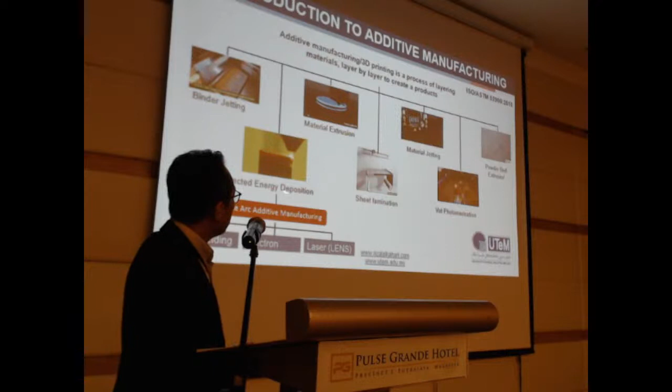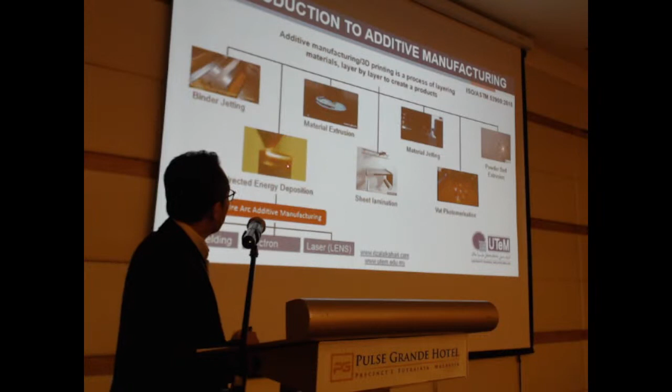So my presentation mainly covers material extrusion, directed energy deposition, and powder bed fusion. Throughout my work and my team's work, most of us focus on this. Of course we have the machines, but more for teaching and learning. The research we do basically focuses on DED, material extrusion, and powder bed fusion. There are a number of classifications for each of these groups, but since I focus more on wire-arc additive manufacturing, later on I will focus more on arc welding.

Okay, so basically this is the difference between the processes, how the materials are laid layer by layer. And these are some of the facilities that we have at the university: binder jetting, selective laser sintering, digital light processing, microjetting, stereolithography, fused deposition modeling, and for metal we have SLM, the open source system from Aurora.

Last year, one of the faculty purchased an SLS, and just early this year we received our robotic WAAM, which we use for CMT. We also utilize a customized microplasma WAAM developed through our project, which has been customized from an open source system. So basically, we utilize a lot based on these machines.

Okay, so if you look at the recent progress and perspective of 3D printing or additive manufacturing, we can see there is an increasing number of people starting to use it. Reports suggest this number will increase further in the future. So having this team, I guess, is the right time for us to focus in this area.

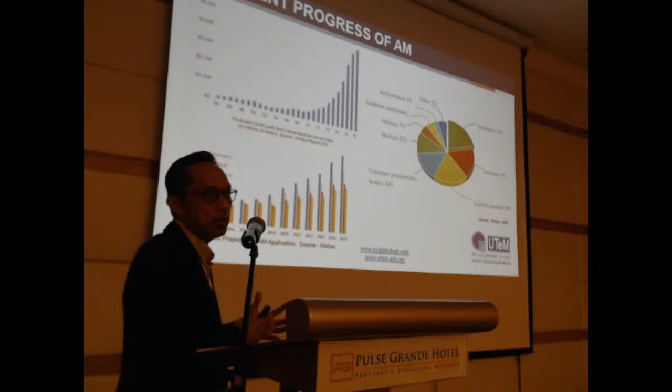In Malaysia, even though there are a certain number of companies trying to offer services in this area, when we apply it to real industry parts, there are a lot of issues. It has also been said there is strong demand for metal parts, even though it's expensive. Many companies are looking forward to having this sort of system in the future.

Then in terms of application, you can see a number of significant projects in the world right now. For example, we have various complex engine parts that utilize metal 3D printing.

This year, a few months back, we had the world's first 3D metal printed rocket by Relativity Space. In May, despite some issues, the rocket was successfully built using wire arc additive manufacturing.

And then we have the world's largest building in Dubai, and the world's first 3D metal printed bridge in Amsterdam last year. So you can see the trend: people are starting to use WAAM and 3D metal printing for various applications.

Even though there are a lot of challenges to implementing 3D metal printing in industry, for example in terms of cost, technical obstacles, standards, and material performance which are not on par with normal materials, people still start to explore the possibilities, despite lack of know-how and people's perceptions.

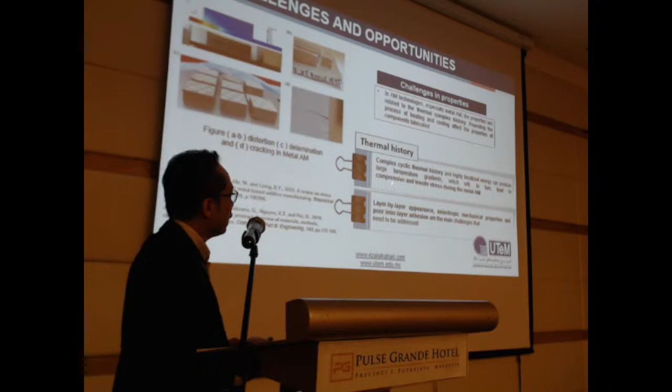So these are the things that are still ongoing research, and we can highlight and produce good results for this.

Okay, so other challenges and opportunities in terms of design: there is low geometrical tolerance, inconsistent part quality, and inaccuracies that will affect the quality of final parts.

But from another perspective, this can be an opportunity for us to do research, where we can reduce a lot of weight and improve thickness and consolidation of parts in order to produce final parts.

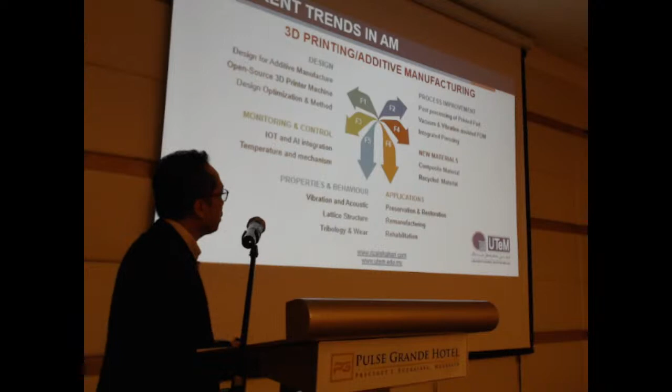Next I will highlight some of the research done at UTeM related to AM. We focus on a few aspects: design, monitoring - not fully controlled yet, just more on the monitoring side but looking forward to monitoring and control, and properties behavior. We apply these to different applications. There's also a team focusing on developing new materials, composite materials - we try to produce our own filament, for example. Another team focuses on process improvement, post-processing parts using vacuum and vibration assisted FDM, and integrated pressing. These are some examples I'll explain briefly, since we started a bit late.

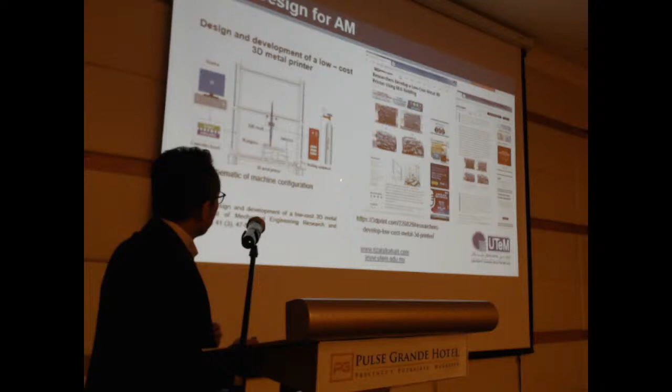There's also a team that developed a low-cost 3D metal printer using an open source system, the one we just saw, which received some coverage on 3dprint.com. We used a normal open source system and modified it based on the requirements for welding purposes. Initially it wasn't very successful, but now alhamdulillah we managed to create more complex structures based on this.

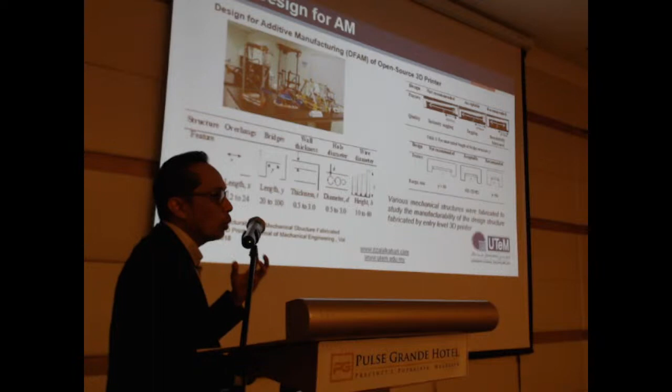There's also a team looking at DFAM - the ability of the parts to be produced with the limited or required behavior, for example, at what range it is suitable or not. We did some research on this.

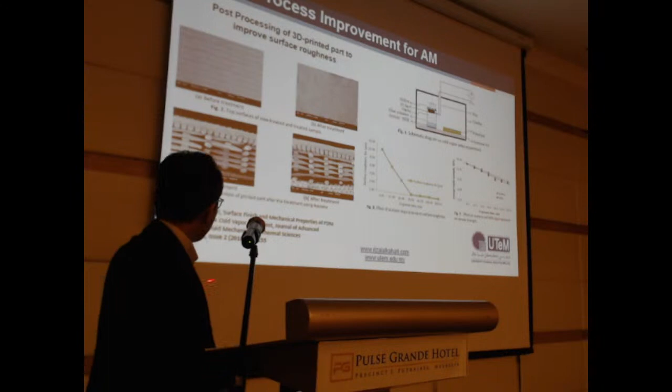We also tried to improve the process by integrating some sort of pressing, vacuum, and liquid deposition. These are some modifications made to the normal 3D printing process. For example, we have post-processing using cold vapor, as we call it. This was published in this journal.

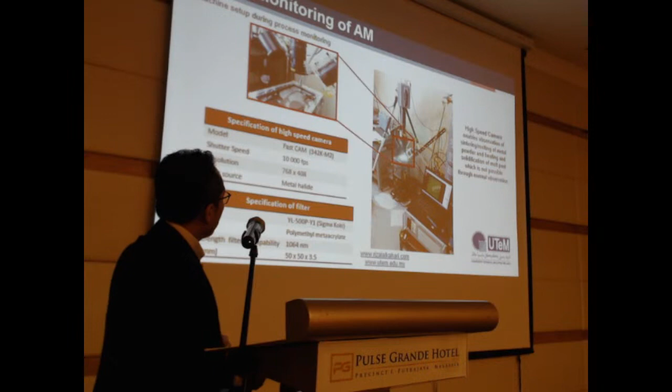Another issue in AM is that we would like to understand the process further by monitoring it. If you look at previous research, researchers tried to understand by monitoring the process closely, but based on that previous research, it's not very clear due to the limitations they had at that time. So what we did is set up this system to monitor closely.

Maybe we can display some video here. You can see actually the laser - this is during the SLS or SLM process. The laser is about the size of my laser pointer here, it's in front, and it will move. Based on that, we can monitor the process closely and try to relate it to mechanical properties.

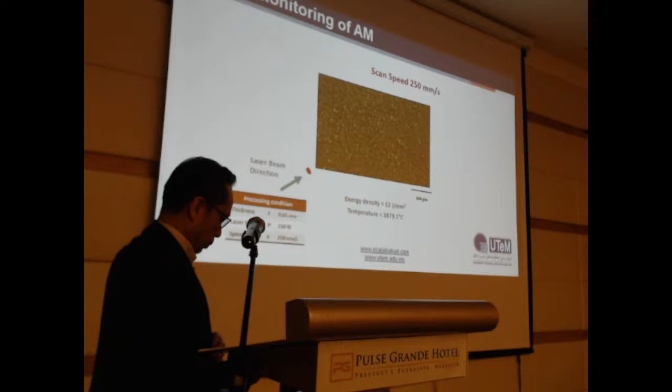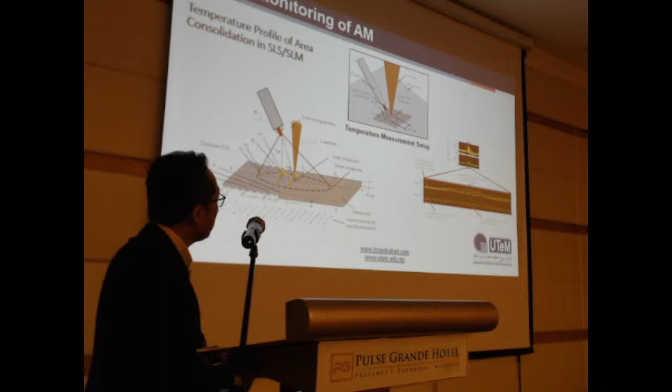So these are some of the labels that indicate the process itself, at different parameters. When we use different parameters, for example at higher speed, we can observe the fundamental issues and relate them to the mechanical properties. From here we can also check the temperature, because the properties are highly relevant to the temperature experienced during the process, and also the microstructure, because once we observe it, we can relate it to the common mechanical properties.

We also tried to observe this for WAAM, but it's still in progress. Previously it was for the SLS or SLM process.

There are some other studies related to materials - we try to use different materials, including recycled materials, and are looking forward to this for SLS, SLM for plastic-based material.

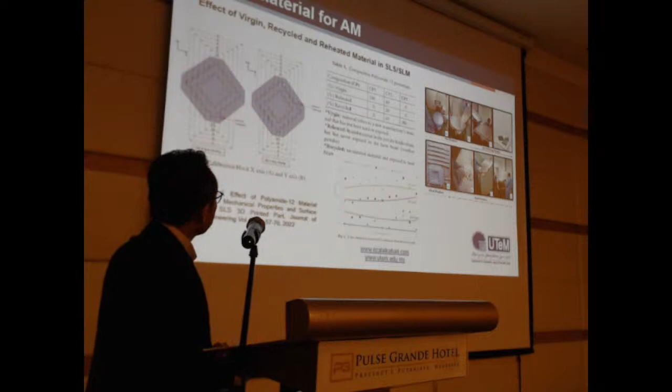There are also groups focused on developing new composite materials. At UTeM we have this twin screw filament extruder, and we can actually produce new filament using these machines, but it's still at the preliminary stage. There's also a team trying to relate the tribological properties, led by PM Dr. Fazli and the team.

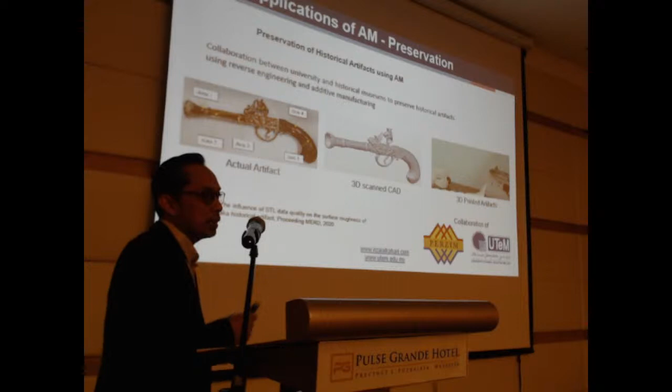There are also teams that work with PERZIM. As we know, Malacca has a lot of history there - the history of Malaysia begins in Malacca. So at PERZIM, Perbadanan - I don't remember the full name, something related to the museum - we try to preserve some of the historical artifacts by using AM.

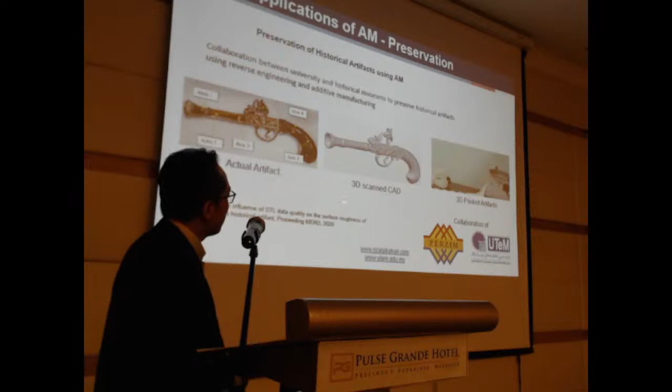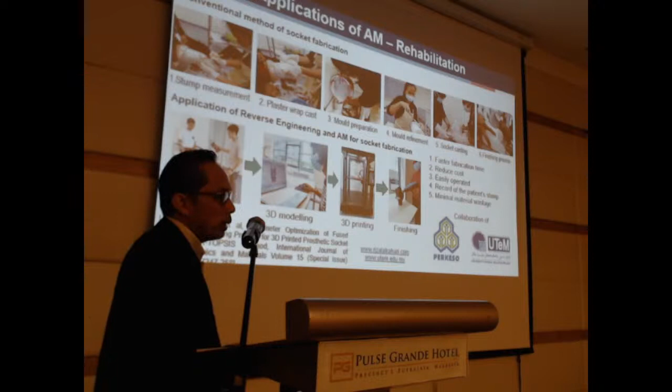We also have some work on rehabilitation. We work together with Perkeso to produce what we call the socket prosthetic leg, replacing the normal process. The normal process takes very long and costs are high, taking about 2 weeks to ensure the material is fully hardened and can be used. But now the time can be reduced to within 8 to 10 hours. Within 1 day, we can produce the prosthetic leg directly.

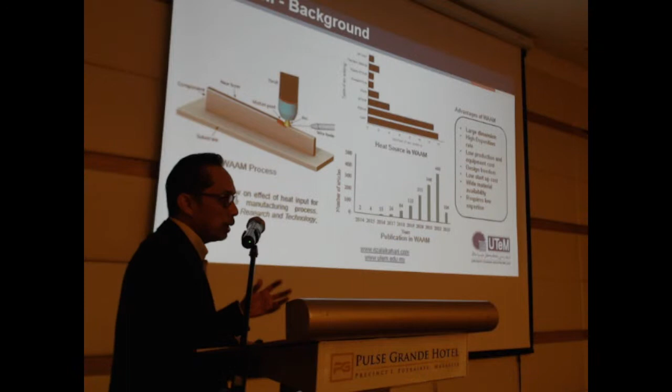A little background on WAAM - Wire Arc Additive Manufacturing. It's very much related to the joining process because welding is a joining process, but now we try to use it as an additive manufacturing process where we lay the welding process layer by layer. Of course, we have to make sure we use suitable parameters and settings so that we can produce a good part. These are the machines we have used.

We developed this in the lab. Initially, we couldn't even manage to get the 3D structure. But after some optimization and improvements that have been done, we recently, alhamdulillah, managed to get a more consolidated structure.

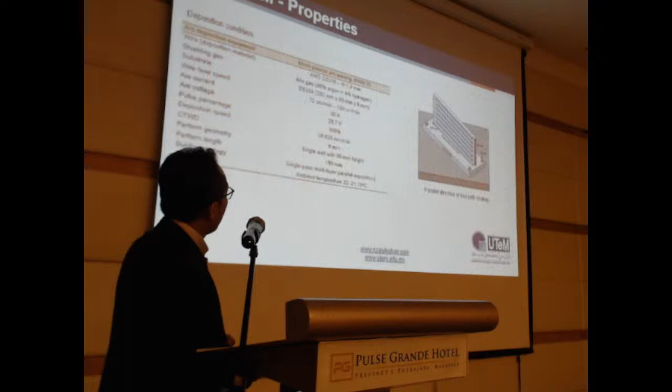These are some of the properties we have used, and then we go for microstructure analysis, studying how the hardness and microstructure differ from one parameter to another. These are some of the microstructures.

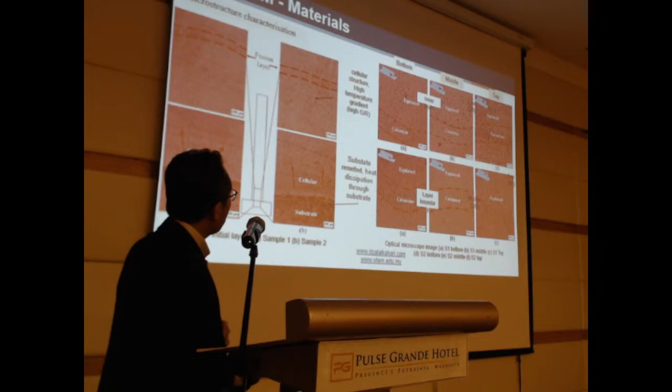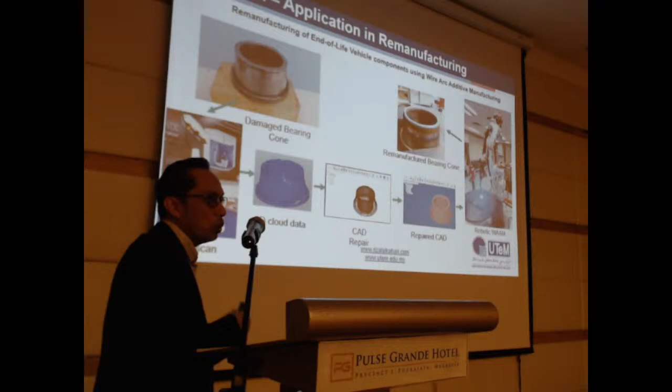Another application is that we are currently using this for remanufacturing. One of our projects is to repair - in other words, remanufacturing is a repair to restore damaged parts. What we did was use a 3D scanner to get the 3D cloud data, then use software to repair it, then send it to the robot WAAM and remanufacture using WAAM. Of course, for quality, we still need to post-process it - we need to machine it to ensure we get a smooth surface.

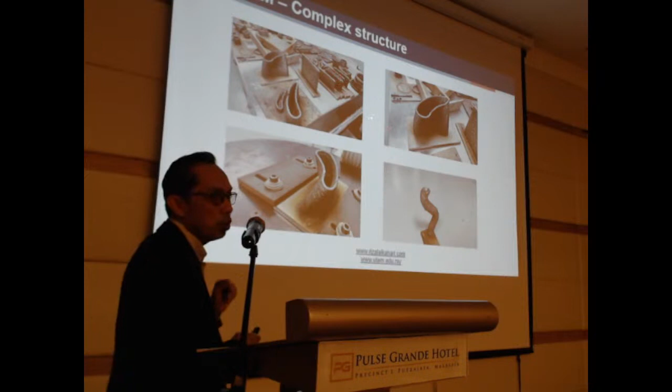These are some of the parts we have produced. Initially, when we started WAAM, we couldn't even get a consolidated 3D structure, because once the temperature is very high, it will remelt the bottom layer again and again. Just recently we managed to get something more complex, not fully there yet, but we're heading towards that. Hopefully in future we will be successful. This part is a blade shape, somewhat hollow, with an angle to check whether it is feasible or not.

So I've explained the current projects that have been done. In future, I predict there will be a lot of integration with other technologies - for example AI, simulation, cloud, system integration, sustainability concepts, robotics, and Internet of Things - to improve the process itself.

Currently we are talking about monitoring, but more important is that after monitoring, we would like to control - to ensure that prior to the process being completed, we already know something might cause a problem, so it is better to adjust the settings beforehand. So maybe there is a need to integrate real-time monitoring and control, real-time NDT with temperature measurement. In future, I believe these are the trends. Prof. Bibita also talked about generative design - these are the research areas we should be heading towards.

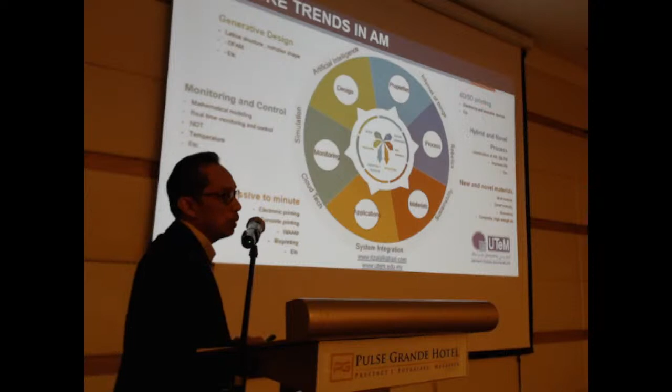Then in terms of moving towards, we are talking about 3D printing or additive manufacturing, but out there people have already started with 4D and 5D printing. So these are the things the future direction will be.

Then hybrid and novel processes, combination of several processes: AM, SM, and FM. SM is subtractive manufacturing, FM is formative manufacturing. And also on the new and novel materials, I believe in future there is a tendency to use multi-materials, smart materials, biomaterials with composites to enhance the process itself.

Okay, so as a conclusion, additive manufacturing, also known as 3D printing, has captured the imagination of many technology observers and manufacturing professionals.

And then the opportunities for fully utilized 3D metal printing are limited due to the printing availability and investment costs compared to the 3D printing of other materials. However, the use of open source systems may enable relatively acceptable part quality to be produced. So these are one of the ways that we can use to reduce the cost, but at the same time open up new opportunities for other research areas.

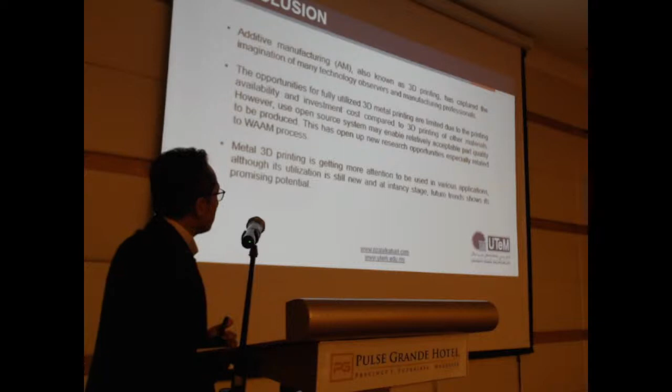Metal 3D printing is getting more attention to be used in various applications. Although its utilization is still new and in its infancy stage, future trends show it's a promising potential. So we should be heading towards that.

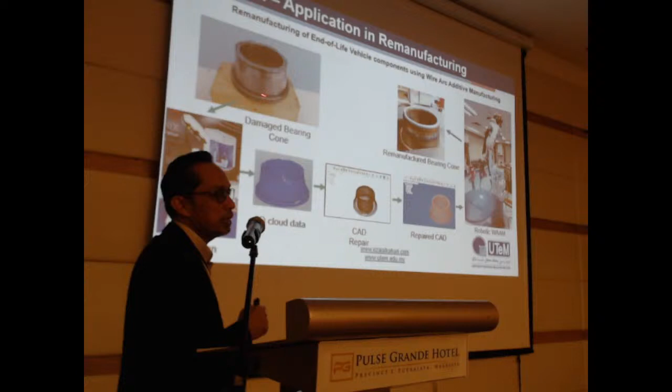But of course there are a lot of issues here. For example, the simplest one, we have to make sure of what we call the origin, to make sure when we deposit the material it is exactly on the same place. So this is a common issue. Another thing is that when we are depositing the materials, there are parts where heat accumulation will occur inside the closed area, so that creates another issue. So once we say there are issues or challenges, I mean there are new opportunities. Okay, I think that's all. Thank you.

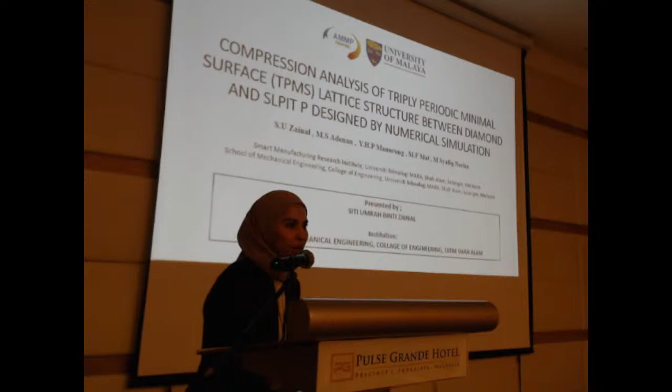Assalamualaikum. My name is Siti Umrah binti Zainal. I'm from University UiTM. Today I want to present my paper. The title of my paper is Compression Analysis of Triply Periodic Minimal Surface TPMS Lattice Structure between Diamond and Split P Designed by Numerical Simulation.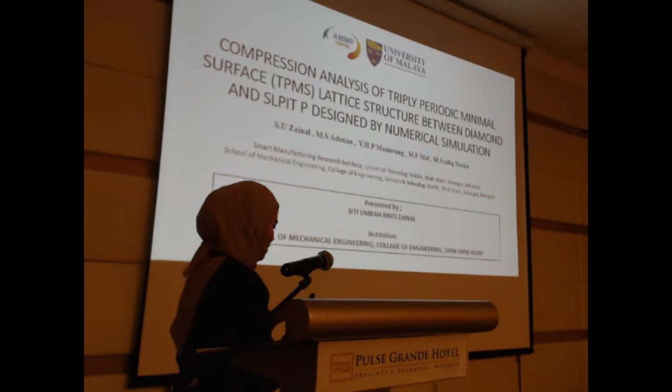Before I go deeper, let me explain what a lattice structure is. A lattice structure is a repeating of unit cell patterns arranged to fill up the array, the space, using a cell map. There are several types of unit cells such as TPMS, honeycomb, plate, and diamond.

Lattice structure actually gives benefits for industry, such as being lightweight, which is good in critical parts, and can give good energy absorption, thermal management, and also osseointegration. Based on the unit cell patterns, TPMS is the famous one because of its benefits all around, good in mechanical properties. So my research is on the triply periodic TPMS.

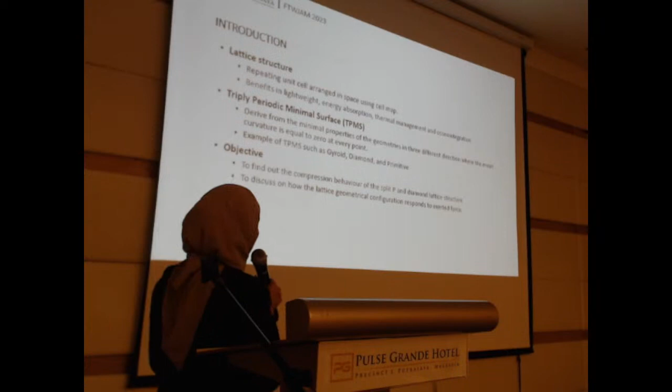So what is TPMS? TPMS is a triply periodic minimal surface, which is derived from the minimal properties of the geometry in three different directions, where the mean curvature is equal to 0 at every point. Examples of TPMS frequently seen in previous research include the famous gyroid, diamond, and primitive.

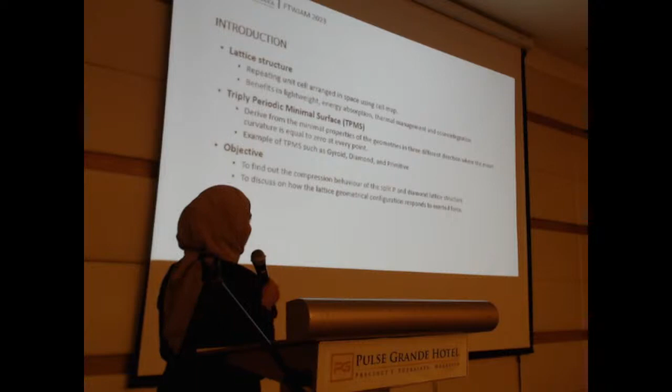The objective of my paper is to find out the compression behavior of the split P and diamond lattice structures, and also to discuss how the lattice geometry configuration between both split P and diamond responds to exerted force. Split P is one of the TPMS lattice structures, and I concentrate on split P because there has been less attention given to this kind of lattice structure.

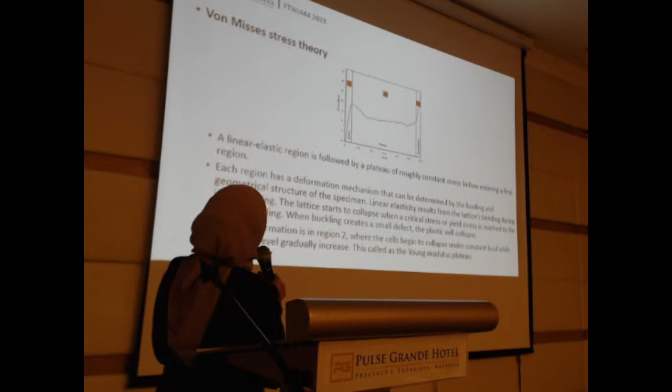Von-Mises stress theory is related to the compression behavior. A linear elastic region is followed by a plateau of roughly constant stress before entering the final region, which is the densification region. Each region has a deformation mechanism that can be determined by the loading and the geometrical structure of the specimen.

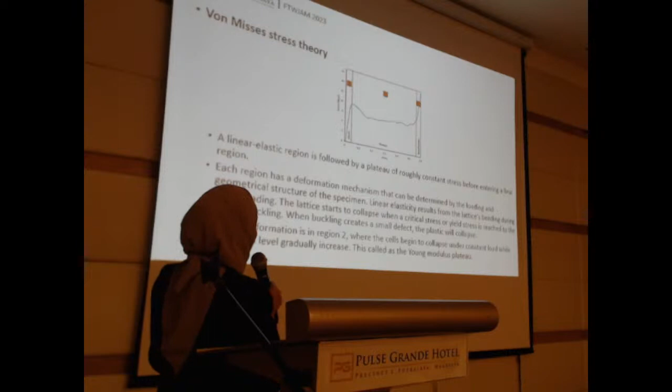Linear elasticity results from the lattice bending during initial loading. The lattice starts to collapse when the critical stress or yield stress reaches the elastic buckling point, normally the maximum point of the first region. When the buckling creates a small defect, plastic collapse begins.

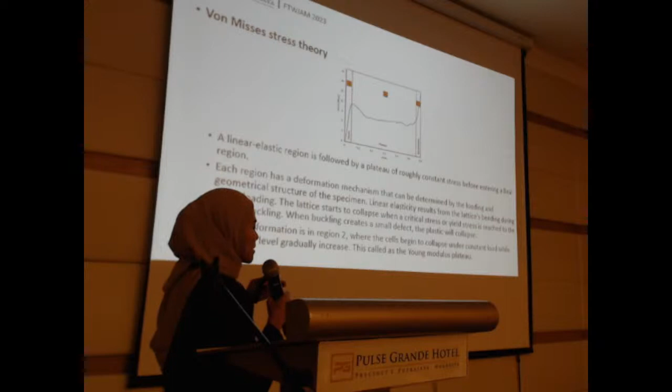Plastic deformation occurs in region number 2, where the cells begin to collapse under constant load while the stress level gradually increases. This is called the Young's modulus plateau. Region number 3 is densification, where the stress increases and the specimen becomes rigid.

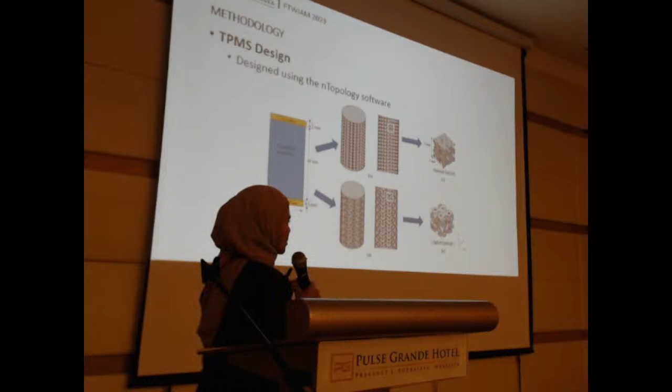The TPMS design can be created using nTopology software, with the specimen in cylindrical shape, height 40 mm, and diameter half of the height dimension. The specimen will fit with the top plate and bottom plate, which is compulsory to get uniform distribution of load. The diamond and split P unit cell size was 5 mm, and its strut diameter is about 0.8 mm.

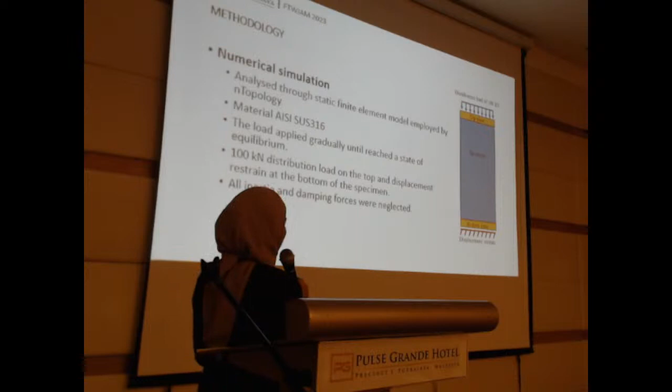Numerical simulation was analyzed through static finite element, employed by nTopology as well. Material chosen is stainless steel 316. The load applied gradually until reaching a state of equilibrium, with a distribution load of 100 kilonewton on the top, and displacement restrained at the bottom of the specimen. All inertia and damping forces were neglected during this simulation.

Result and discussion from the analysis: Von Mises stress recorded that split P has 55% higher value than diamond. However, the maximum principal stress is lower, about 29%, than diamond.

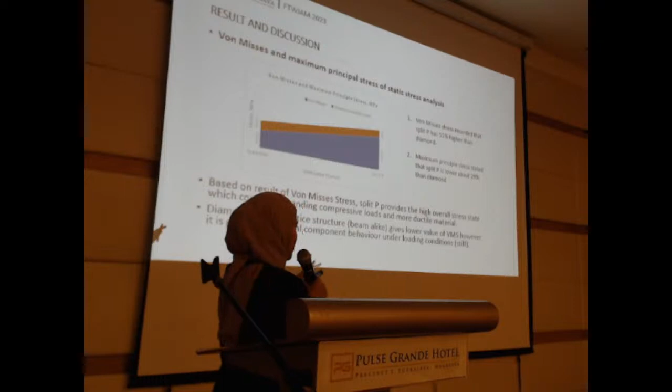Based on the von Mises stress result, split P provides a high overall stress state which could withstand compression load, and split P is actually more ductile compared to diamond. Meanwhile, diamond shaped lattice structure gives a lower value of von Mises stress. However, diamond is very good in structural component behavior under loading condition, meaning diamond is stiffer than split P.

Based on the result, it shows that diamond has a lower von Mises value, but it has high stress concentration with a significant tendency to cause plastic deformation at the uppermost layer.

Von Mises is also known as the equivalent stress, which combines the effect of normal and shear stress. It is derived from the concept of distortion energy theory. When the shear stress or distortion energy of a ductile material reaches its highest value, yielding of the ductile material starts. Failure of the ductile material happens when the yield reaches elastic buckling to form a small defect, and then the cell will collapse.

The split P geometry properties have strong interconnectivity of the unit cell in the structure, giving the von Mises stress value high performance in mechanical properties.

Two more minutes, miss.

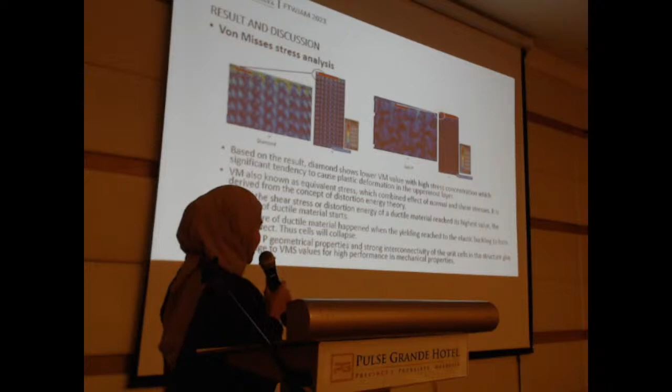Maximum principal stress analysis: diamond and split P show high magnitude at the uppermost layer, at the joint of the strut and plate. However, diamond has a higher maximum principal value of 3,645 compared to split P with 2,855 MPa. In comparison to the interconnected diamond-shaped unit cell, the structural behavior of diamond is stiffer under loading condition.

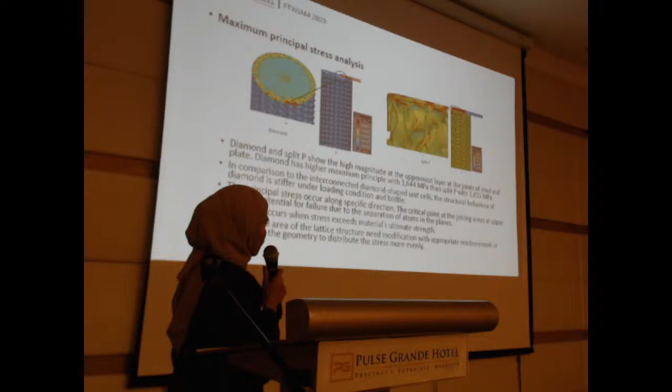Diamond is brittle, and the principal stresses occur along a specific direction. The critical point at the joint area at the upper layer is potential for failure due to separation of atoms in the planes. Fracture occurs when the stress exceeds the material's ultimate strength, and the critical area of the lattice structure needs modification with appropriate reinforcement or geometry changes to distribute the stress more evenly.

Displacement of deformation: split P records about 2.7 mm of displacement compared to diamond with 3.48 mm. The result shows that split P indicates a small amount of total displacement deformation, and split P has the ability to withstand the exerted load without compromising safety and efficiency.

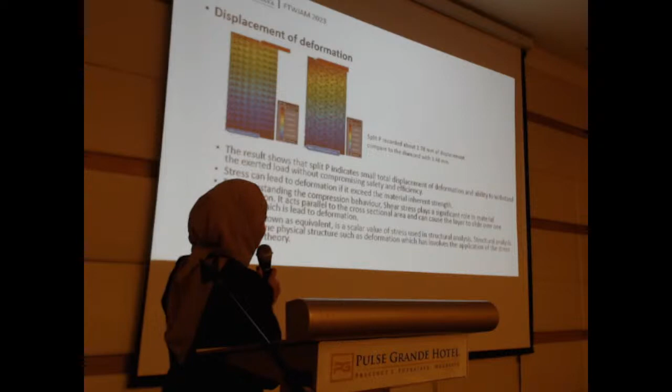Stress can lead to deformation if it exceeds the material's inherent strength. By understanding the compression behavior, shear stress plays a significant role in material deformation parallel to the cross-section area, and can cause layers to slide over one another, leading to deformation.

Von Mises, also known as equivalent stress, is a scalar value of stress used in structural analysis to determine physical structure behavior such as deformation, which involves the application of stress and strain theory.

As a conclusion, overall, the split P lattice structure is capable of withstanding uniform exerted load and offers more effective load-carrying path, resulting in a greater capacity for supporting stress compared to diamond.

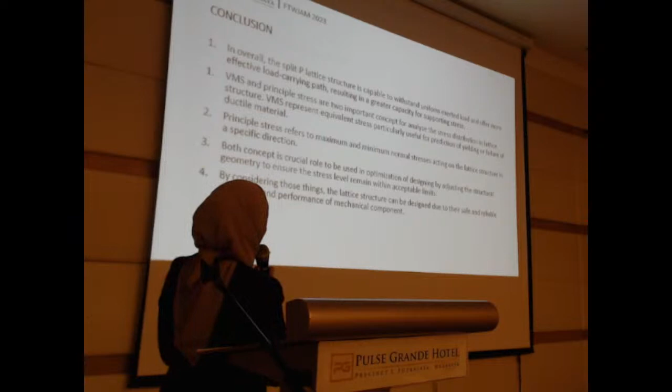Von Mises stress and principal stress are two important concepts for analyzing stress distribution in lattice structures. Von Mises represents equivalent stress, particularly useful for prediction of yielding or failure of the material. Meanwhile, principal stress refers to the maximum and minimum normal stresses acting on the lattice structure in a specific direction.

Both concepts play a crucial role in optimization of design by adjusting the structural geometry to ensure the stress level remains within acceptable limits.

By considering the von Mises and principal stress, the concentration area, the localized critical area, can be adjusted and redesigned for a safe and reliable structure, enhancing the performance of the mechanical component.

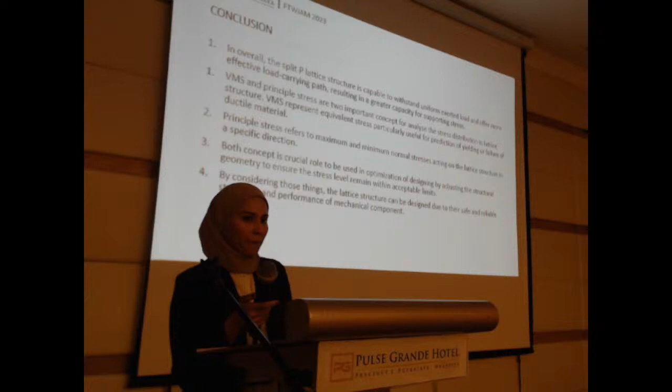Okay, I have two questions. One is, I sort of expected the stress not to be concentrated at the end of the specimen where you mount the specimen, basically where the clamp is.

I would expect in my mind that the stress would be uniform.

The specimen attached to the clamp - I'm wondering whether it could be due to fixed nodal displacement at the nodal point that constricts the displacement and causes the stress to concentrate there. I was wondering whether the connection between specimen and clamp is a fixed displacement or a sliding one, with planar freedom for the node to slide, because I would imagine that's fixed in the axial direction but not in the perpendicular direction.

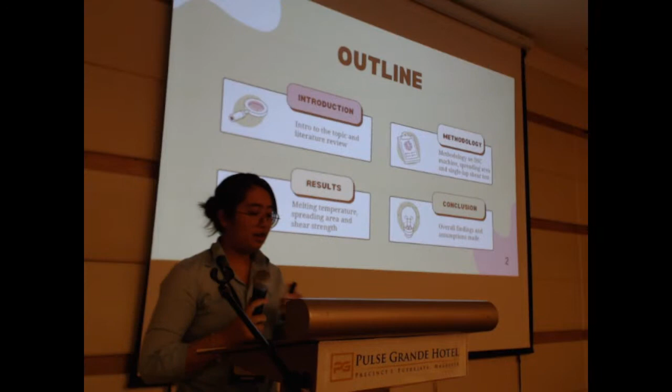So this will be my outline throughout the presentation, consisting of introduction, methodology, results, and conclusion.

As most of you know, the common solder is always the SNPB, or lead-based solder, which is very effective in connecting material with low melting point, along with good mechanical and wetting properties. But lead is said to be very toxic and can affect the environment and health, which is why we want to focus on lead-free solder to replace it. Then we considered zinc, aluminium, silver, indium, antimony, but the perfect choice we came up with is bismuth.

So therefore, what motivates us to do this project is to investigate the properties of SNBI with different bismuth compositions, and to investigate the wetting properties, which is the spreading area at different reflow temperatures. Lastly, it is to simulate mechanical properties of the solder joint in terms of stress, strain, tensile strength, and ductility using ANSYS software based on different mechanical parameters such as velocity and temperature.

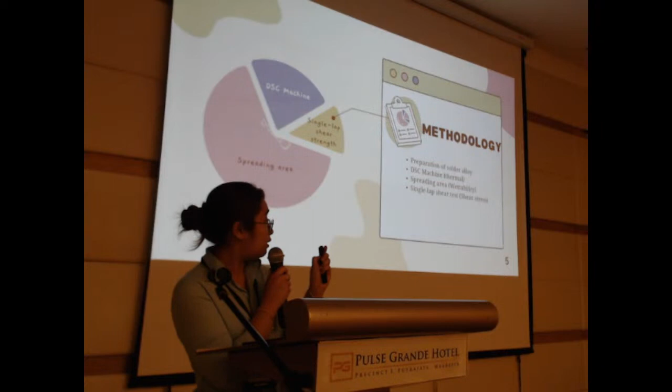So moving on to the methodology. As you can see here, I'll be discussing the solder preparations, the DSC machine for thermal tests, spreading area for wettability tests, and also single lap shear tests for the shear strength.

These are the sequence of solder alloy preparations. It starts with weighing the tin and bismuth according to the bismuth compositions. Then the metals are heated in the furnace at about 400 degrees Celsius, held for about an hour, then cooled down. It then goes through the remelting process where the solder is placed on the hot plate, then the sample is pressed using the hot press machine with no temperature required. The pressed sample is then formed into billets about 5 mm diameter, which will be used for the wettability test later on.

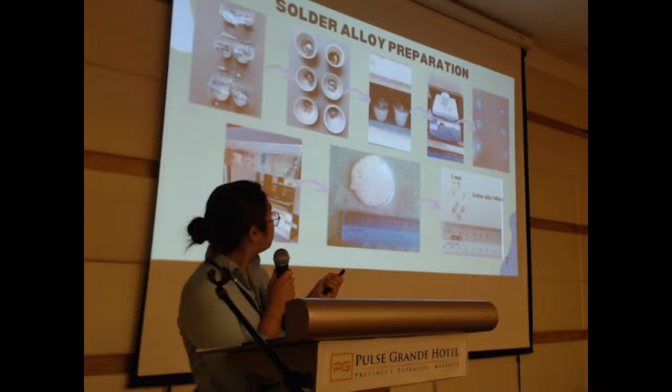For the first experiment, we run the DSC machine with the leftover debris from the solder alloys. About 5 milligrams is used in the DSC machine for each of the solder alloys. Nitrogen gas is used as the medium because it is more stable. The sample is placed in a sealed crucible in the DSC machine, with temperature ranging from 100 degrees Celsius to 300 degrees Celsius, then back to 100 degrees Celsius, so that we can obtain the phase diagram. We wanted the exothermic and endothermic peaks of each solder alloy.

As for the wettability test, before placing the billets we apply zinc chloride flux onto the copper substrate to avoid oxidation. Then the hot plate is wrapped with aluminum foil, and the temperature is monitored using a thermocouple to check the reflow temperature before putting on the solder billets. Each solder billet is heated for about 30 to 40 seconds, then cooled off. From there, the spreading area is measured under the enhanced microscope, which straight away gives the spreading area.

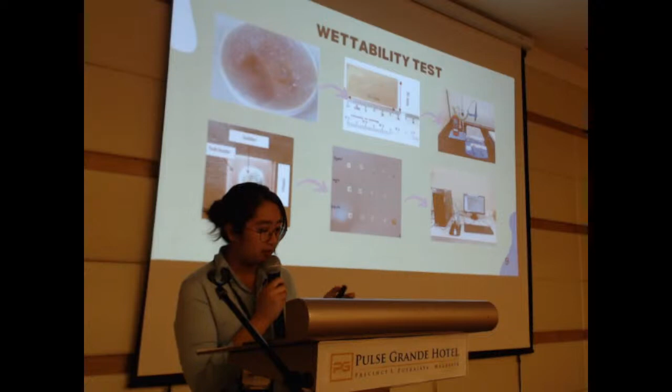For the single lap shear test, it is conducted under a simulation. A 3D geometry of a single lap shear joint was constructed using SolidWorks software according to the ASTM D1002 standard. The geometry consists of two metal plates according to the dimensions shown here, with copper assigned as the substrate of the metal plates.

Then the geometry is applied to ANSYS to test the impact of the load applied. The mesh sizing used is about 3.175 mm, with the refined region employed as hex dominant mesh for higher accuracy simulation results. One metal plate is set to a fixed support on one end. At the other end, velocity is applied in the positive x direction to replicate the cross-head speed during the shear test, with y direction displacement on the bottom of one lap and the top of the other.

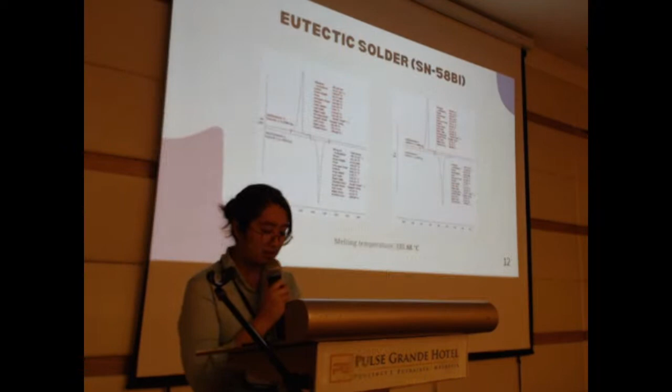So onto the results. As you can see in this first diagram, these are the phase diagrams from the DSC machine. I tested 2 times for each composition just to get the average. For 58% bismuth, the melting temperature is about 135.88 degrees Celsius. For 68% bismuth, it is about 138.88 degrees Celsius, and for 48% bismuth it is 147.33 degrees Celsius.

So from the results, we can see that bismuth definitely has an impact on the melting temperature.

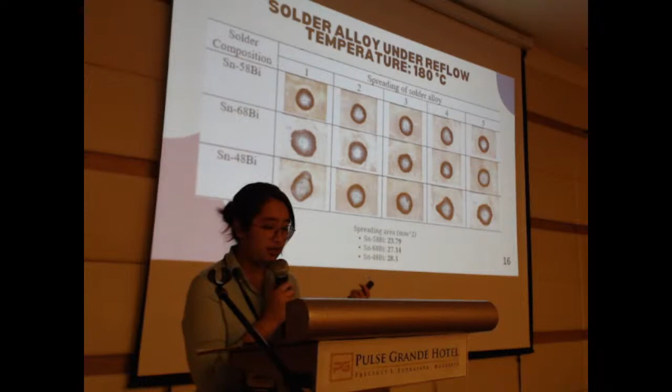So this is the wettability results. I used 3 different bismuth compositions as previous, but under 2 different reflow temperatures, here for 180 degrees Celsius and here for 210 degrees Celsius. As you can see, for 210, the spreading area tends to be bigger.

So from this, I can deduce that different reflow temperatures does affect the spreading area. We could see that 180 degrees gives the best spread compared to 210 degrees, because 210 tends to overspread the solder.

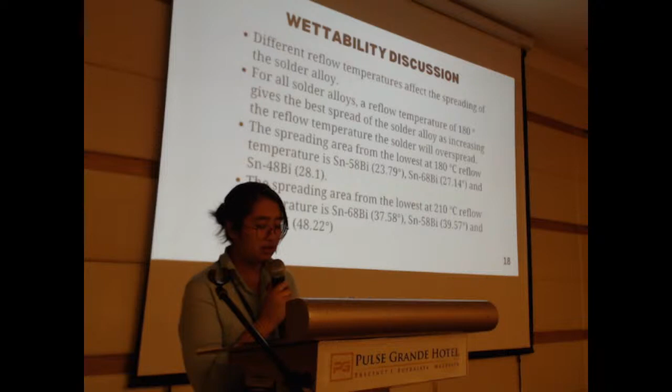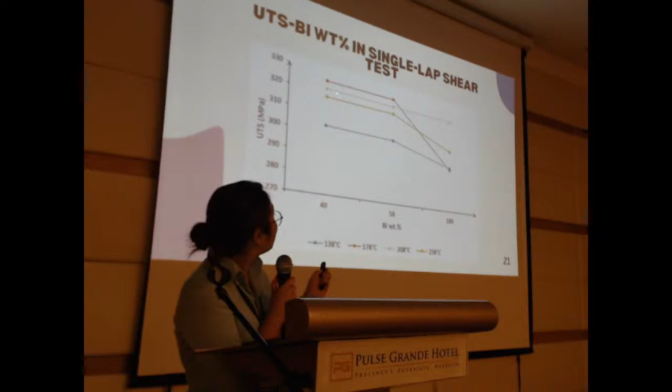So another graph, just to make it short. This is basically the tensile strength and also the bismuth contents. But just to sum things up, increasing the bismuth does obviously have an impact, as you can see here.

Dr. Noridzwan. You are given 10 minutes time. We'll be sending the mark at 8 minutes. Okay, the floor is yours. Test. Test, test. Test.

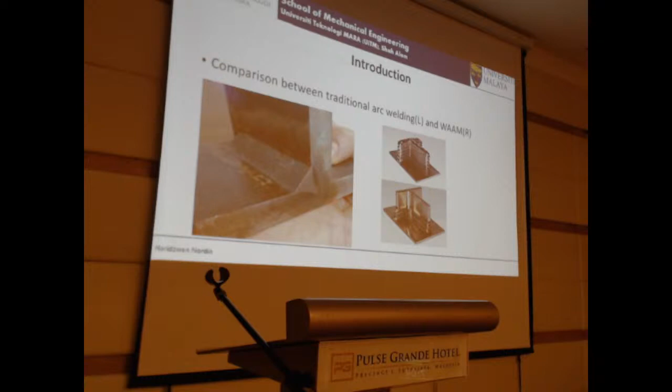But in wire arc additive manufacturing, which I'll just call WAAM, there's more filler metal—a lot more in volume and quantity than the base metal. So that is quite a significant difference.

Okay, just going to go straight to the objective. I'm trying to model this because traditionally we do have welding simulation, but it's for joining. Conventionally we use welding to join metal parts, but now we're using arc welding to build additive manufacturing, 3D printing, and so on.

We have a traditional heat source used in simulation, but conventionally it's used for joining. So the question is: can we change things around and maybe make something simpler that gets as good a result, or an acceptable result within the margin of error, but something less computationally intensive?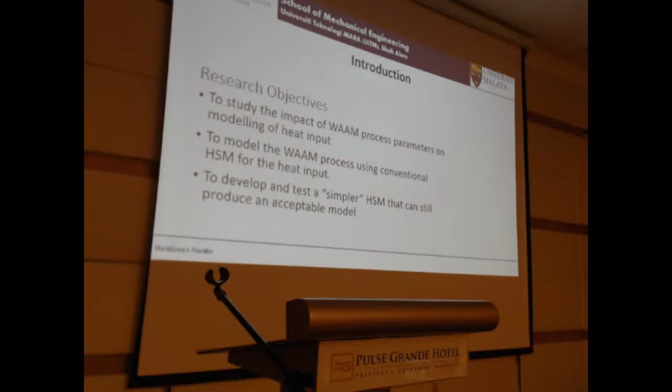I'm also working on austenitic stainless steel 316L. In my study I'm using gas metal arc welding, GMAW, and for the simulation I'm using MSC Marc, a general purpose non-linear solver.

The other thing is this is a very simple preliminary experiment, as a preliminary study before I continue on to do some more deeper experimental testing. So bear in mind this is a very simple bead-on-plate, as we call it.

Traditionally we use, this is the most popular heat source model for simulation in finite element analysis, the Goldak double ellipsoid heat source model. Basically it looks like an egg, or half an egg, and the heat is distributed normally—there's a Gaussian distribution. I think everybody who knows Goldak knows this function. This has been the standard for the last two to three decades.

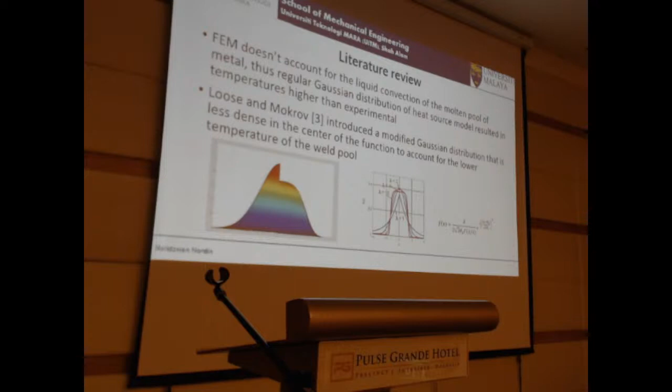Alright, so you can see that if you increase the lambda exponent from 2 to 4, it has to be an even number - 2, 4, 6, 8, 10 - it sort of approaches like a square, becoming like a perfect rectangle.

So the question is, can we just simply use a constant value with some modification and get close enough so that we can save on computational time and work on a bigger mesh, like a more complicated specimen rather than a simple one?

So what I did was this simulation. At this point in my research, it's still just simulation - this paper doesn't have an experimental stage yet. So basically this is a simple bead on plate.

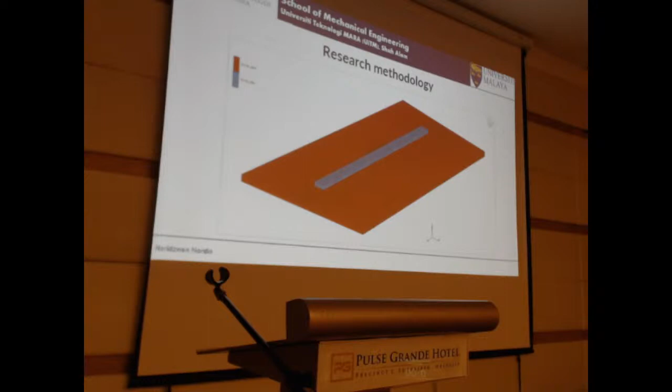It's just a plate with a simple line of filler material, filler wire. What I did is, usually in finite element analysis software you can run your own custom code, in Fortran, and do your own function. So that's what I did. We wrote a custom function for 4 different types of distribution, or heat source model: uniform, parabolic, Goldak, and then the modified Goldak.

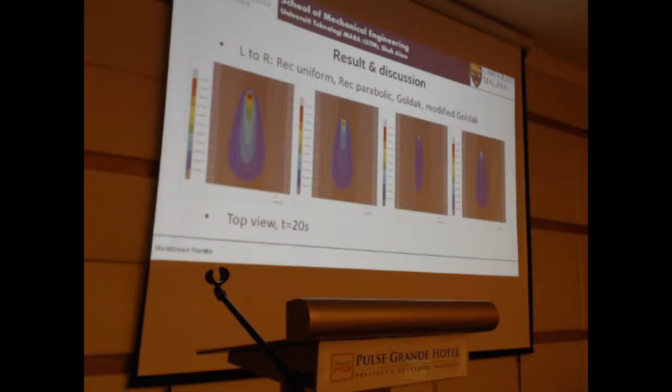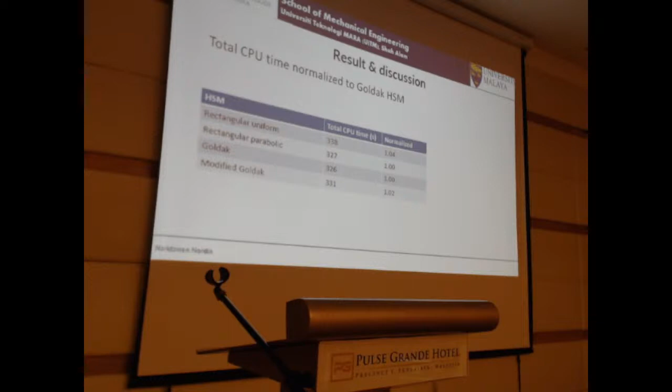So the next step is to find out why it's contradictory, and also try to refine the function of the process. Even though I said simple, the actual CPU calculation time is basically the same for all. So I believe there's too much overhead in the compiler module, everything.

Going forward, the plan is that maybe if you want to do a proper apples to apples comparison, just do it in a more direct programming language like Python instead of through FEA software where there might be overhead. Thank you so much. Okay, alright, so that's it.